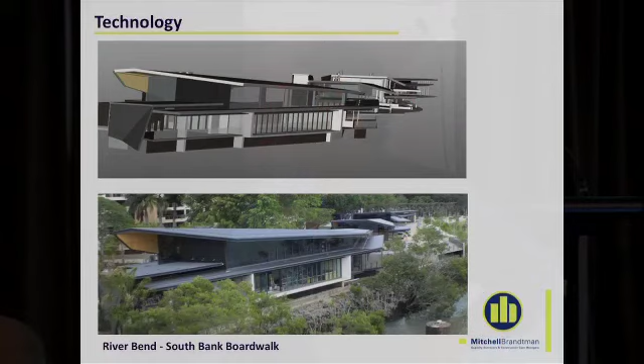So what I want to share with you are some images just to give you an idea of how that comes together. This project was a project designed by Arkhefield. It's at South Bank, and it's an iconic building, pretty special sort of building. It's worth going and having a look. But the photo we took last week looks like that. So you get a very close relationship between the model and what's actually built.

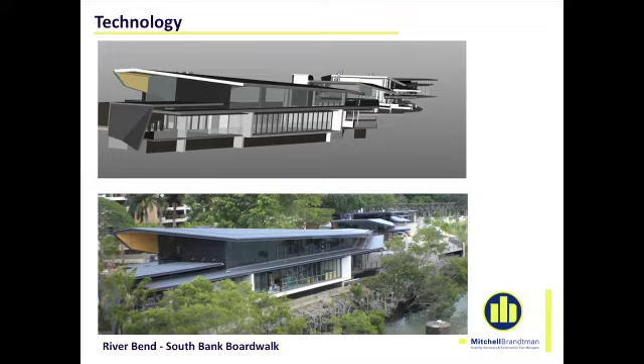It's not just in building, this is happening in infrastructure works and also in land development. So modelling is really coming into its fore. The real shift is that we used to produce drawings and then we did a model. The difficulty with that is the model is what we produced our sales plans from, what we produced our images from. The drawings changed and this was wrong.

Now the way it works is the model is everything. From the model, the plans are produced. From the model, the costings are produced. And from the model, our marketing material is produced. And there's a close relationship between the model itself and the plan. It goes through all the disciplines, so it includes not just architecture, but structure and civil as well.

Here we're looking at another project. This is the Midtown, which is under construction. It's just a slice of the model and looking at the plan, and this is the plan of the building. So there's a very close relationship between the model and the plan, obviously. Any change that's made to the model replicates through all the schedules. So the door schedules, the window schedules, all the technical data changes with it.

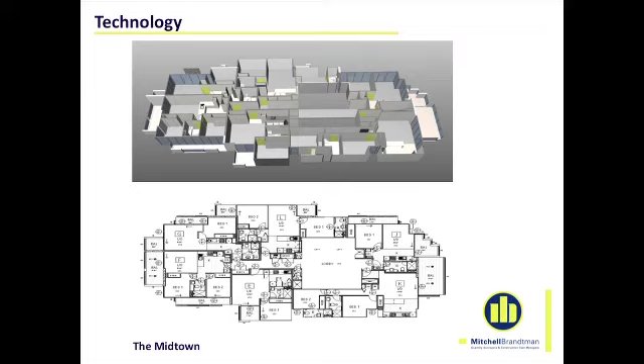What this means to me and how I use it. We use a program called CostX, which I'll run a video for you in a second, just to give you an idea of how it works. But within these models is lots of information. How that's played out for me is I can spend my time applying intelligence and wisdom to a project rather than spending 90% of my time calculating a quantity.

The quantities are now reliable, and it's more of an interrogation type and verification exercise that needs to go on. Once it's set up, we can then leverage off it. So we can do it extremely fast. You just recompile models for different alternatives and different scenarios.

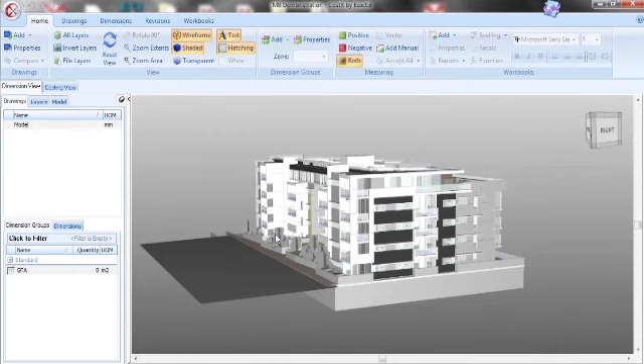So this is the software, and it's about to import the model into it. So this is just the blank software. What it has is our intelligence linked to it. So it's got templates and current prices, so the real prices attached to it. Imported the model in, and this is a view. So at the moment, we're looking at the model space. We're looking at the view of it. Later, we'll turn to what the estimate is.

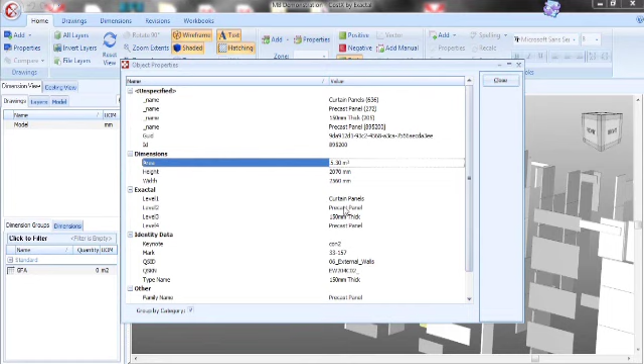Here, we're looking at the precast panels, and we can get information about those precast panels. And from it, we can call up the precise properties of those precast panels. So we can look at what the perimeter of it is, what the area is, what the cubic meters are. When we're negotiating with a builder, there's a high degree of certainty, and it's the same with subcontractors in explaining and being able to rely on quantity. Start to bring prices back to quantities rather than gut feel of what a bathroom might be worth. And it starts to drive costs in the way that you want them to move.

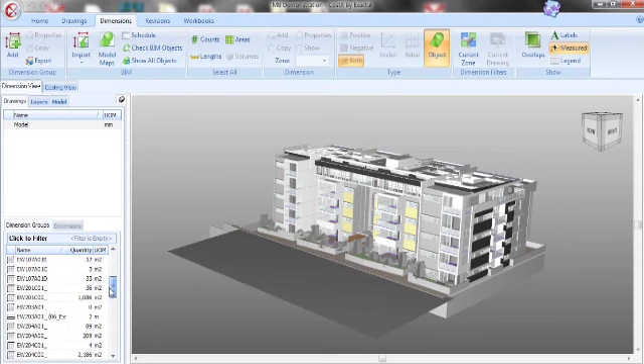The next thing is you will start to see down the bottom left-hand side of the screen information being imported. So we've not measured anything. The same codes are coming into the model in terms of the elemental codes. We're now getting the quantity of the precast panels, which is 2,186 square meters. The next phase is we bring in our template. So we bring in a template and we start linking it to costs. And what we get is a first cut of the design like that. So we get an estimate in moments.

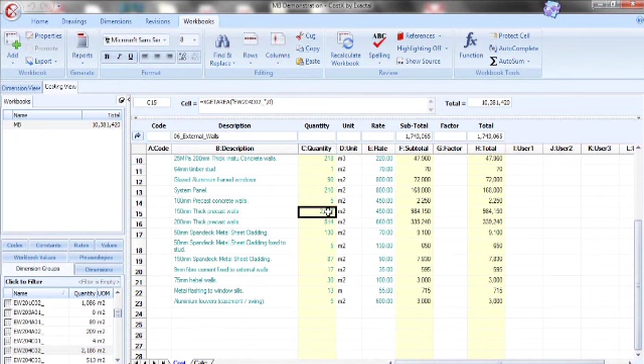The shift is this is just a first cut. So it's now what you do with that information. This is work that we've done collaborating with Arkhefield. So what we've done is provided codes and placed those codes within Arkhefield's model. When that model comes to our office, our price list knows what it is, and it's able to link everything together. The technology is one thing, but it's the intelligence and the wisdom that goes together with it. It's how it's linked together that makes it work.

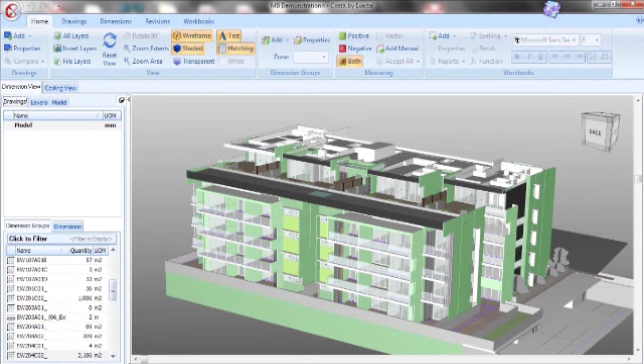And while I think 3D modelling is the way of the future, and it's a must on all projects, you need to work with people that know what they're doing. Because it's not the technology here, it's how you use it that's important.